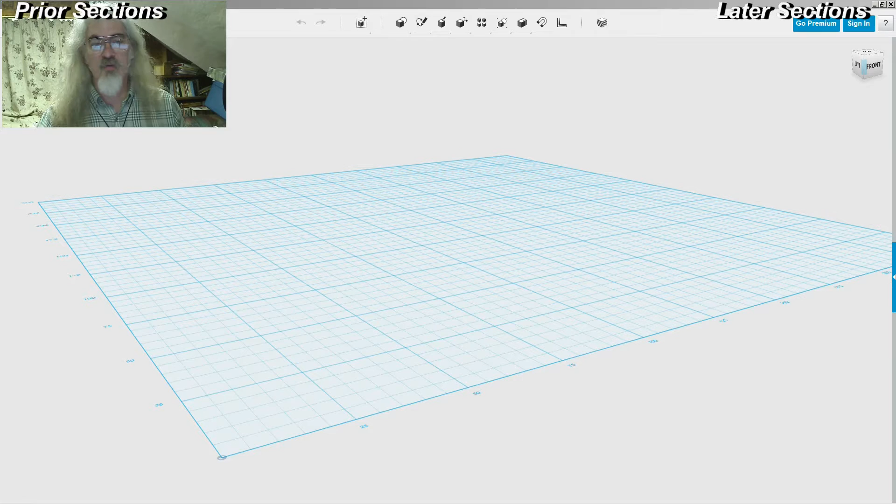Now here's actually a copy of what the Sea Dragon rocket looks like, and it's really kind of hard to see here. Let me just drag it over and put it in the screen capture mode, and I will zoom in on this thing. Notice it says station number, feet.

This command module down here is the Apollo command module. It's kind of difficult to imagine how big this thing is.

170 feet - it says water line right here. This thing is actually launched out of the water, out of the ocean. Come down here, there's only one engine bell - this is the outline of the engine bell right here.

This engine bell is 75 feet across. And 536.89 feet total. For reference, the Washington Monument in the center of DC, in the mall, is 550 feet tall. So this is almost as tall as the Washington Monument, and it's actually bigger around.

So we're going to do a model of both stages. This is stage 1 from here to here, and this is stage 2 from up here, and then this is the payload, this little tiny thing up here.

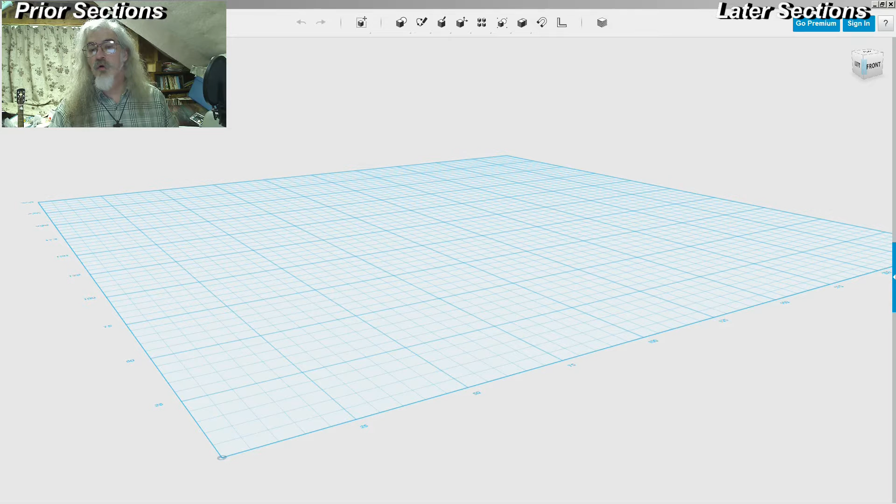But basically we're going to start with a cylinder that is the first stage cylinder itself, and that system goes from - where's the cylinder start - about 350 feet to 434 feet. Now I'm going to use 1 millimeter to the foot.

I don't know whether I can actually print that or not. Probably can't... no, I probably can. I may have to scale it to print it. I have a Leapfrog creator at work, so I may actually be able to try and print it on that.

All right, so over here in 123D Design, insert a cylinder. We're going to put it right on the center of the origin. Its radius is going to be 75, and its height is going to be 434.76 minus... where's that stage start? Let's see if it gives me an actual point. I just don't want the center of the thing to be at the center of the environment.

Minus 300, minus 150. Oh, you just let me do that. 434 minus 350. Did they really take that functionality away? That's a darn nuisance. All right, shoot, maybe I'll do the math in my head. 84 feet.

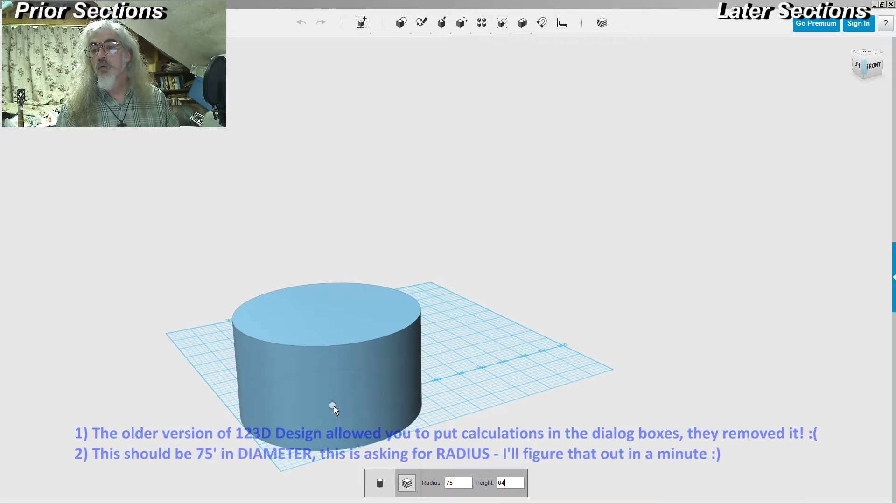That can't be right. 75 feet in diameter. 434. 350. Radius — it's a 37.5 radius. Proportion looks better. Helps if you remember it's radius and not diameter.

The upper stage is from... it's like about 105 feet to, what did that one start? 350? 105 to 350, it's 145. So this cylinder is going to go centered on that cylinder, 37.5 and 145 feet.

Does that look right? Yeah, that's not bad. Okay. Right, let's pull this back over here. So what you're seeing here is this is the first stage cylinder, and this is the second stage cylinder up to here. Those proportions look about right.

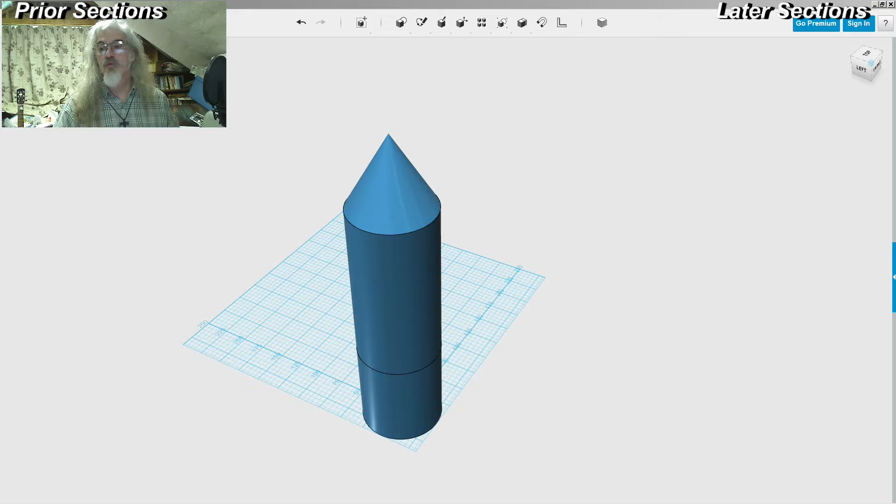Now that cone's actually going to get cut off because the top section is... I wonder what the diameter of the command module is. Let's see if I have it in the picture. That's stage 1, so this is what stage 1 looks like. This nose actually is reinforced to splash down in the Atlantic Ocean.

So I'd have to go look up real quick what the command module diameter was. Honestly, let's see, I think I want to guess. So we're going to guess that that was 15 feet in diameter. Can I put a cylinder directly up on top? No, it wants to make it...

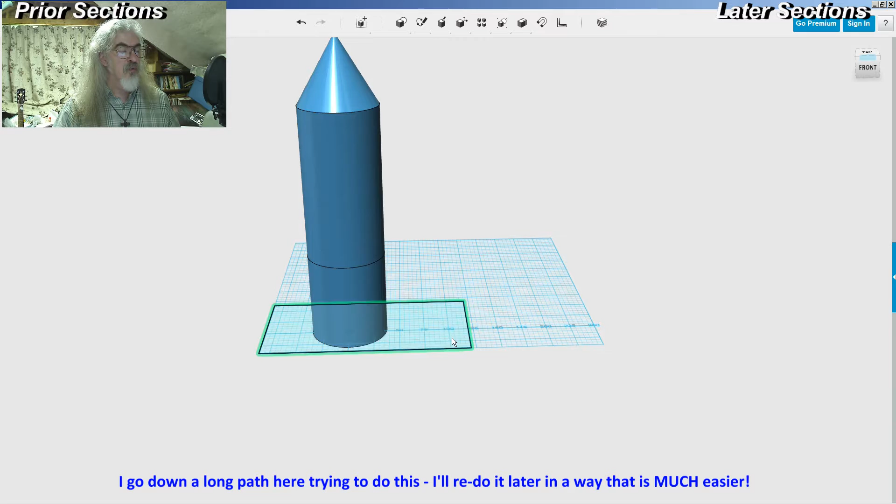Okay, so let's do this. Sketch a rectangle — doesn't matter where, right here. We're going to take this rectangle and move it up by... I said it started 42 feet. 42 minus, darn, this thing's big, 42 minus 434, 392 millimeters.

Obviously I did something wrong there. So let's measure it. What's the measure of that ring to that ring? Those results are 145. And that ring to that ring is 229.

Clear that. What's this point? Need to point to that ring. It says that it is 229. 145. 84. It's not 145.

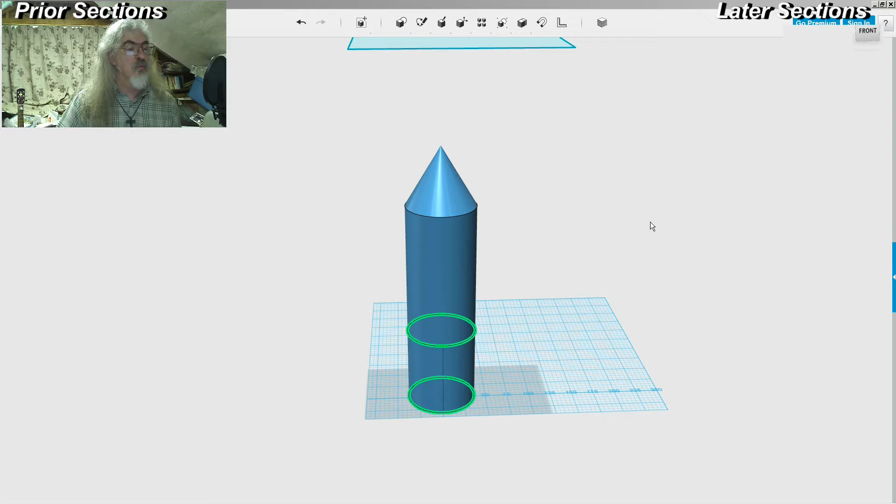It is. Close this. Move that. Move it that way. 100 millimeters, because I made this too short by quite a bit. So I need to make it taller. So what I'm going to do is grab that face, press pull that. I think I missed by 100.

It only let me do it in plane. That's kind of interesting, not what I had in mind. What I'm going to do is move it up here, 100 millimeters. Actually, let's move it back where it was. All right, let's redo that. Undo this, move vertically by 100, and move laterally by -100.

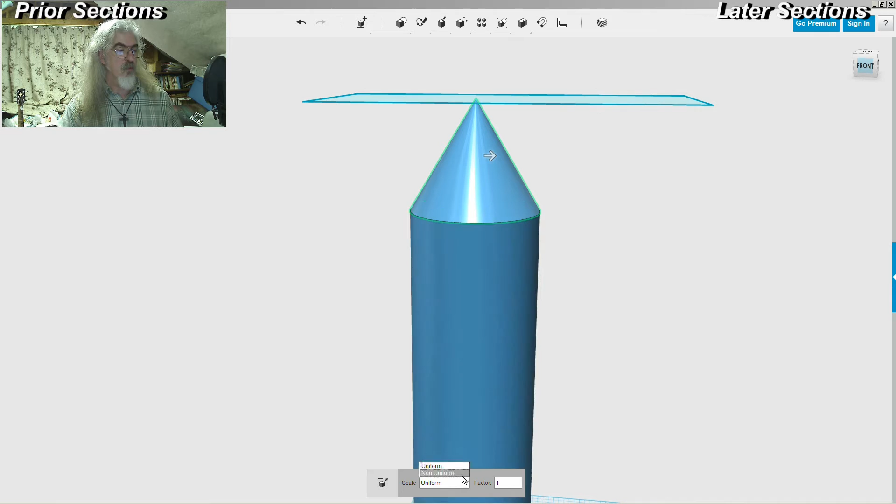Just put it right back on top, and now — oh, look at that, everything is right where it should be. Scale, non-uniform, XY, 1.2. So the only thing I wish it would do is scale it from a base point rather than scale it up and down. I'm better off at this point drawing a new cylinder.

Delete. I mean a new cone, oh I'm sorry. 37.5 and a height of 42 feet. We go through and do the math again. It goes from 42 to 105, so it's 63 tall.

Right, okay, so that puts that plane right here. Let's move this down. What I'm going to use — I'm going to use this plane to cut that cone.

At about the right location, I'm going to kind of guess. Alright, so now I'm going to use this plane to split.

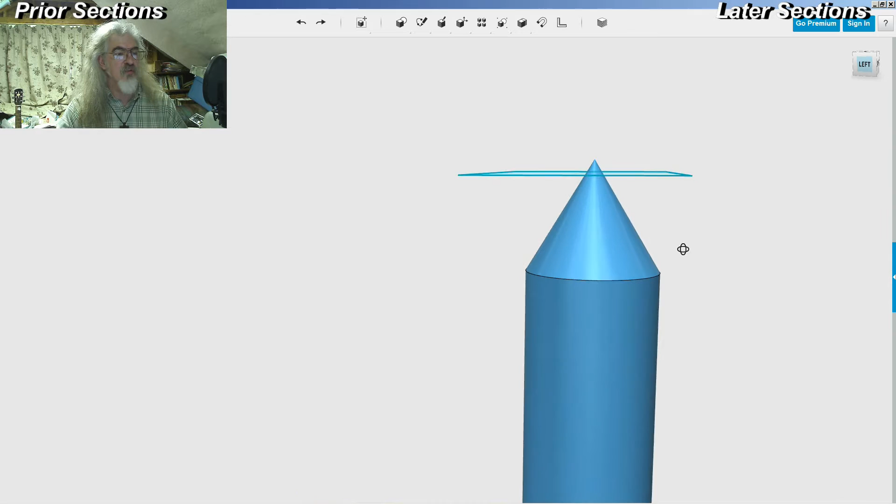So we have this sketch plane. This is where we want to cut this cone. Now, the easiest way to cut this cone is to make another cylinder and then cut the cone by the cylinder, but I need that cylinder to start at this plane.

So if I have a cylinder, I can actually put it on this sketch plane. See, it kind of won't let me do that, and it won't let me put this cylinder up here. So what I really need to do is create a cylinder that's right at the sketch plane. So I want to take this and project that onto this sketch plane.

Alright, now I have a cylinder. Now I have a circle, a sketch circle. So I'm going to extrude that sketch circle up, and it automatically deletes it, and I can get rid of the sketch plane. Alright, so now I want...

As you can see here, I have a short cylinder before I actually have the nose cone.

So I'm going to need to know what the diameter of that circle is. So let's measure that. It is 4762 in radius. Let's see.

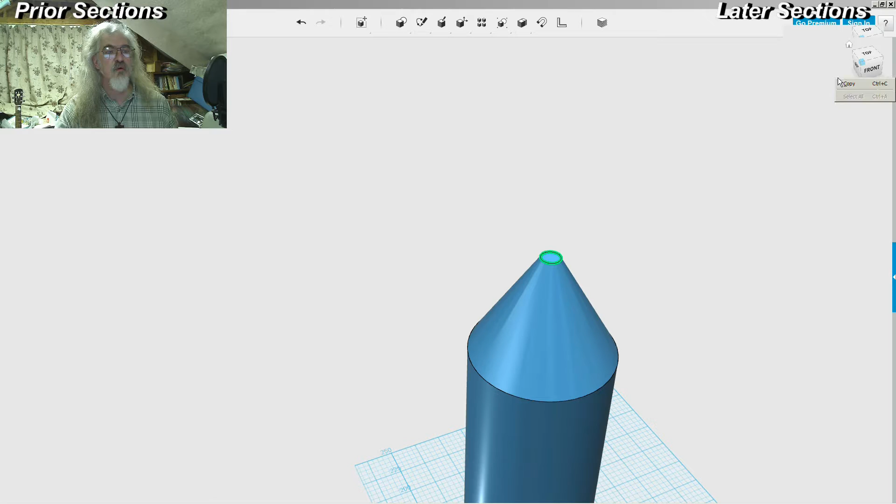Copy to clipboard. Let me do it. Come on. Select all. Copy. Okay. Close that.

Cylinder right here on the top center. Put it in the middle. 4.762. And a height of, I'm going to actually just take the default height, and then I'm going to guess,

Because what I'm going to do is I'm just going to make this look pretty good. Press pull this, move it down. It's going to be about, I'm looking at the picture, about like that.

Alright, and then we're going to need another cone on top of this. Cone right here, 4.762, same diameter, and a height of 10, 8, shorten that, 6, and that's about right.

Alright, we don't even have the rocket motor on the first stage yet. Okay, and so this is approximately what it's going to look like.

I'm going to go ahead and save a copy of this to my computer. Now that I've gotten pretty close to this, let's see, go up 1, go to Sea Dragon, go down, Sea Dragon 1. All right.

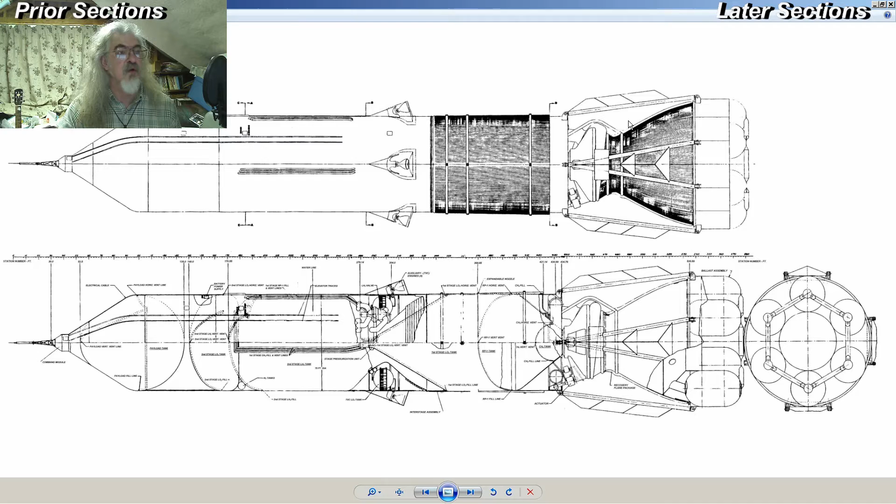So for something like a 3D print, not too worried about it. I may go back and refine it later, make a curve out of it. I can make a curve out of it now and revolve it around the center line. And maybe I'll do that.

All right, in that case, I'm going to need a line. But to get a line so that I can revolve something around about the center of this, what I'm going to need is I'm going to need a line.

I need an object I can revolve it around. All right. And to do that, I'm going to need a line.

So to get a line, what I've got to be able to do is draw vertically from the center of this thing. In order to do that, the easiest way I know how to do that is to go ahead and put a box in the middle of this.

And then my center's not actually centered. This thing is 20 by 20 by 20, so this is a standard size default box, and it's in the middle of the cylinder. What I'm going to do is I'm going to move it

so that its vertex is in the middle of the cylinder. Alright, so now that vertex is actually in the middle of the cylinder. The whole thing is not actually in the center of the 0 to 0 sketch.

And I'm going to draw a line from there, first point here, second point here. Done. Okay.

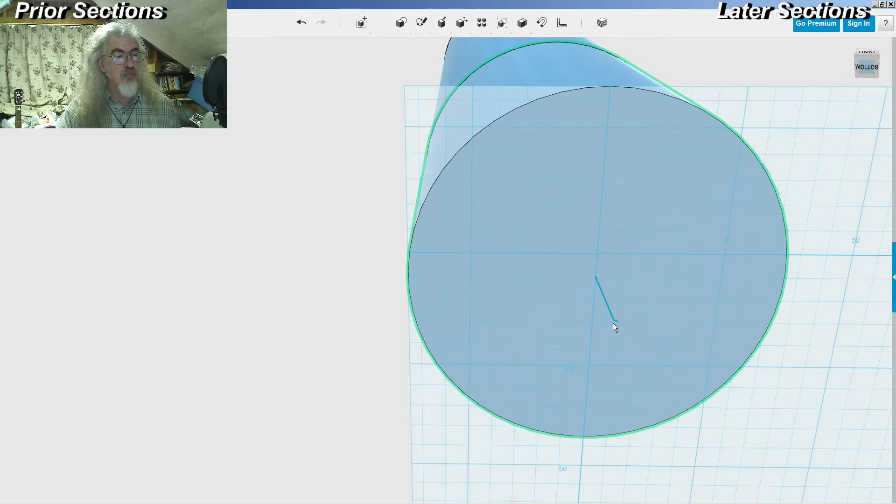Now I'm going to delete that. Now I'm going to delete this because I don't really need it anymore. I ended up with 2 lines inadvertently. I don't need the second one. I just need that middle.

Alright, so then let's do we need to do a sketch. Again, I'm going to need a different... Alright, so let's put it out here. That sketch is going to actually come...

Where's the plane of that thing? Let's move this out to here. Can I move it out to the edge? I don't know how wide this is.

So let's move it this way. Let's move it back to where that thing was before. 10 that way, 10 this way, and then we're going to move it to the left, minus 37.5. So now the edges should line up right on this edge.

Alright, that's good. Now, that thing needs to be a lot taller than that. I just need a surface for the sketch. I just needed to know what surface it was on, so I needed something right on the edge of this cylinder.

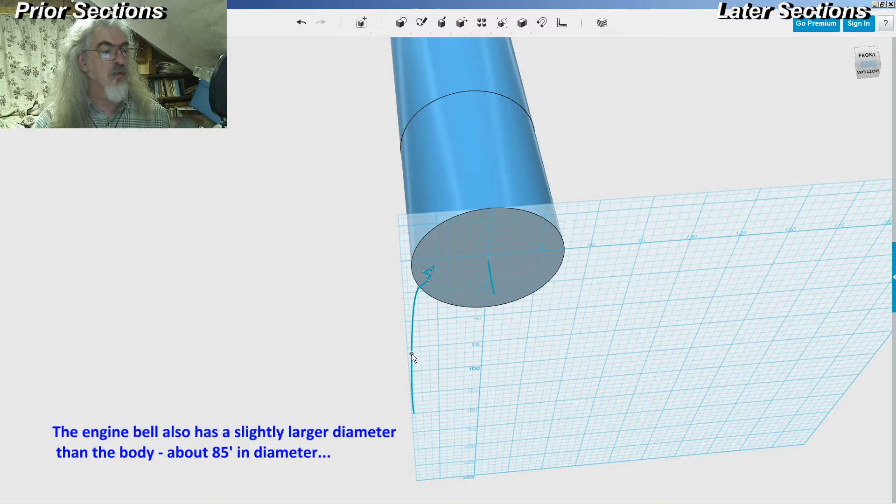The engine flares out. This needs to look more like that. This comes in here a little farther. This comes down. I'm just screwing with the splines here a little bit.

What's that look like here to here? Close, that's 80. Starting to look a little more like it. All I really did here was give myself enough control points that I could go screw with it.

Alright, 80, so it needs to be basically down here. Now, I can't... Now, see, it can't go that far out. So the whole thing actually needs to come in a bit.

Perspective was screwing me up a little bit there. You can do an orthographic view here too. Where are we now? Oh, 100 millimeters. That's pretty cool.

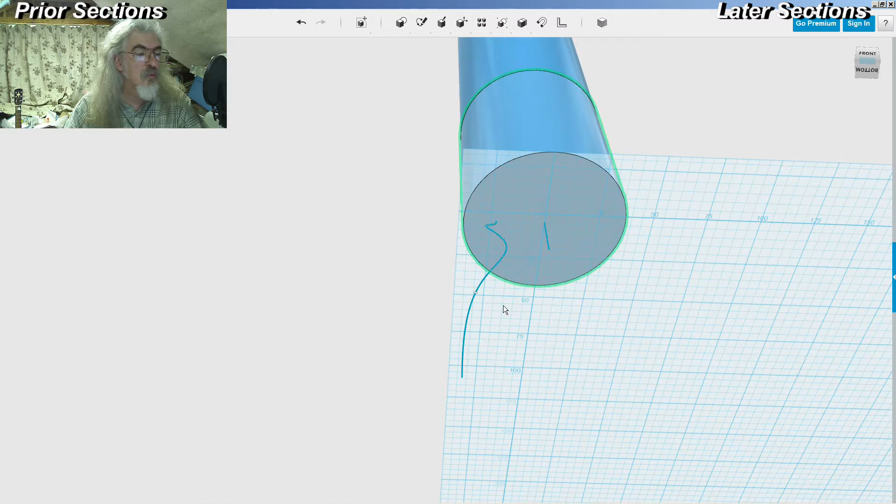I still think that shape's not quite right. This needs to come in, and this needs to come in. That started looking like it. Yeah, that looks pretty good. All right, let's take this spline and revolve it. Revolve.

This has to be closed. Silly me. All right, so I need to have made a closed path here and not just a curve. That curve's not going to do me any good as it is. All right, so it's got to be a closed face. Get out of that mode. So what I need to do is make a polyline.

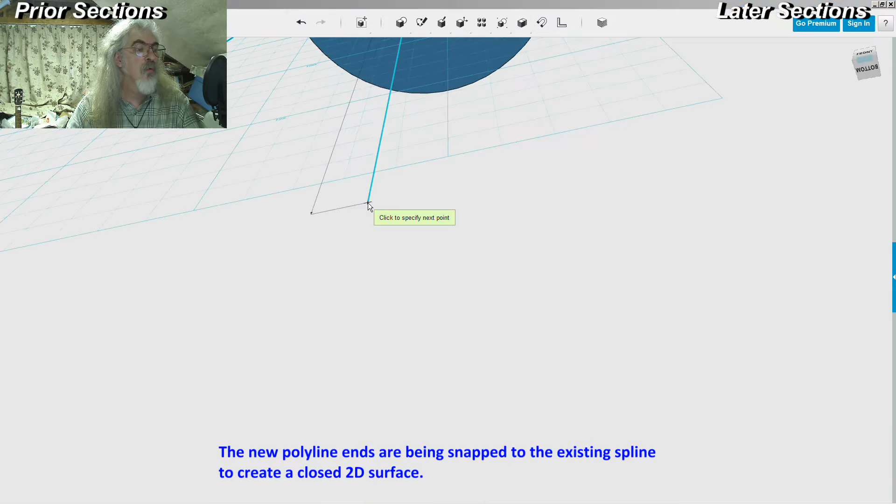Whoops, grabbed the wrong mouse control. We're going to hollow this out anyhow, so it doesn't matter if this bottom is exactly parallel. Now I've made a solid. Okay, now I can take this whole thing and revolve it.

That's what I want to do. Take this face and go on the widget, revolve it about... profile that against that... 360.

And you won't do it. Why? Axis is... new solid... 360. And there we have our engine bell.

That's not too bad. That's not too bad at all. And it looks a bit like a rocket. Again, I'm guessing on the engine bell shape exactly, but it's not too bad.

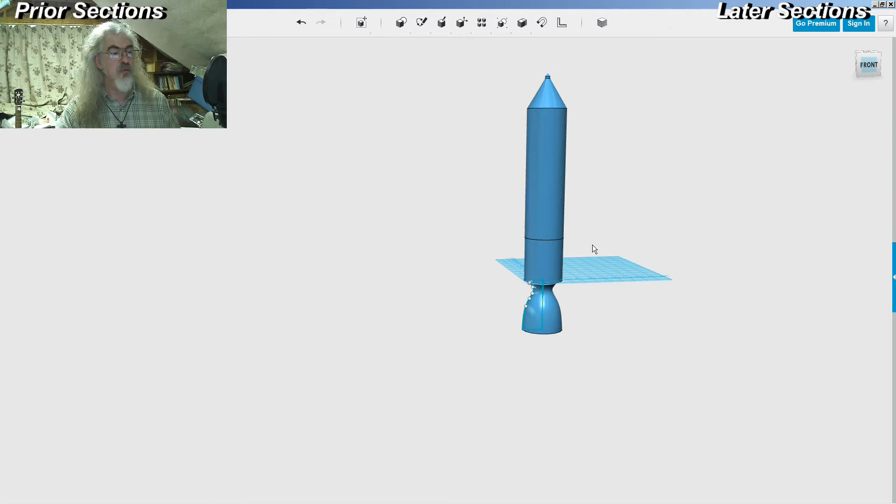Now the thing is, it should be hollow, of course, right? So I want to take this shape and shell it out. Shell. Put this inside.

Huh, doesn't know how to do that, huh? That's interesting. Well, sometimes the limitations of this package are kind of interesting.

Let's do this. Radius 35. Yep. Height 80. We're going to take this thing and rotate it 180 degrees.

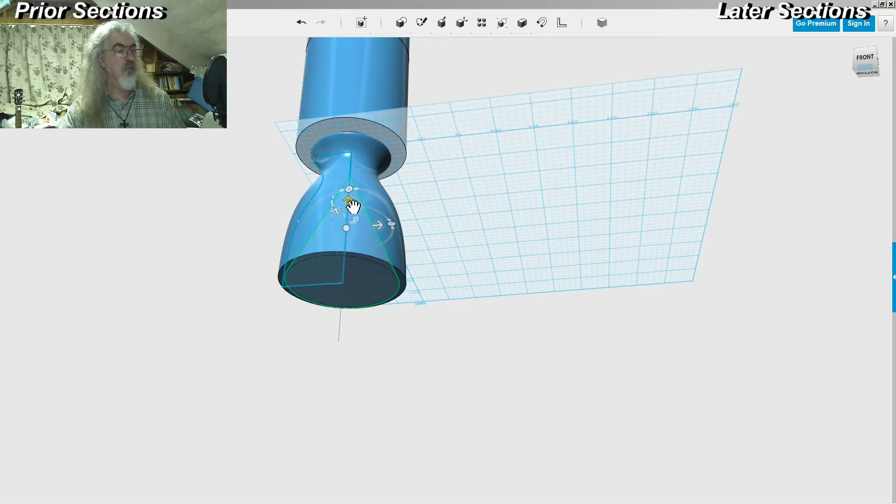We're going to take the whole thing and move it up by... I don't want to go all the way up to 80, even though it's 80 tall. Let's just go to 79.5. And then let's do this: merge, subtract that minus this.

I was curious, let's move this up by 79. Must have had it rotated not exactly 180. Subtract the large minus the small. There we go. Now we have an interior engine bell, at least a couple millimeters thick.

Now we're getting somewhere. At some point I'm also going to go back and if I take these three things and group them together, now I can move that whole thing up. I need to remember how much I moved it, so let's move it by 100. That way I know where it is.

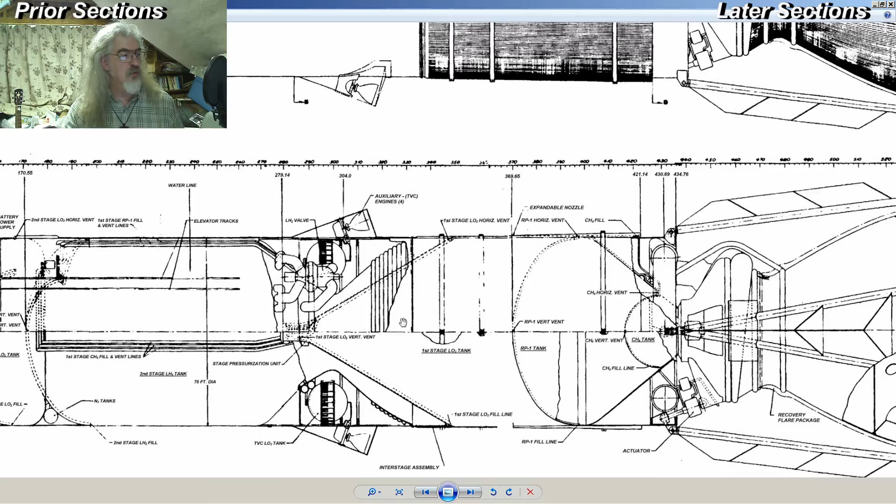One of the other features of this crazy system is that the first stage, in order to have more tankage, didn't cut off straight. It was actually pointed, and you can see that here. See this point right here? This is part of the tankage of the first stage. This is the engine bell for the second stage. So the first stage actually goes up inside the second stage in order to increase the tankage and shorten the overall rocket. Otherwise it would have been 700 feet tall or something crazy. It's pointed, kind of like the first stage is also pointed.

So I'm going to need to add a cone to the top of this. That represents the first stage. 37.5, and how tall is it? Jeez, I don't know. Let's say it's 40 tall. Looks about right, I'll go back and figure it out.

Now I'm going to take these things and group them together. Let's move it back down. That's 100. Let's make a copy of this, because I'm going to use it to subtract this stage from that stage, and I want to make sure I don't lose it. So I'll copy it and paste it, and it automatically gives me a move dialog. I'll move it over 100, and then use a subtraction - subtract this minus that.

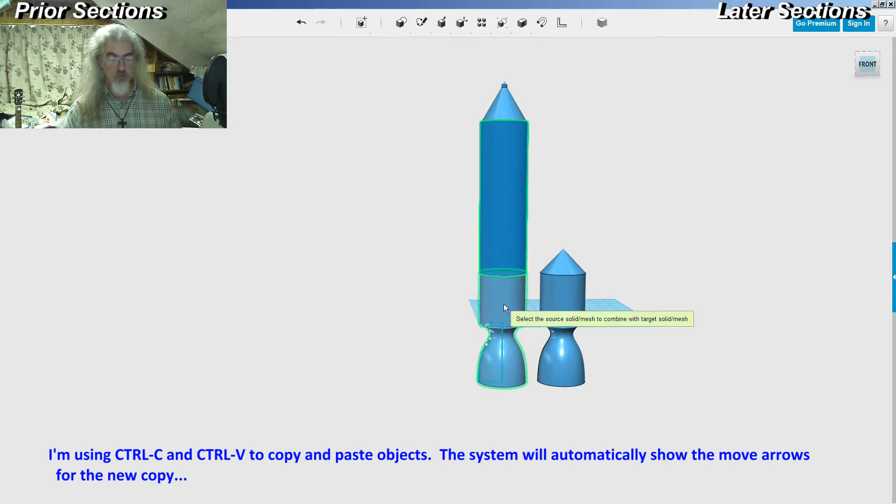Now I'm just going to leave the sketch. Now there's a cone in there, it's hard to see. Move that back by minus 100. So there's the basis of that.

Now the next thing I want to do is the vernier engines. These are the control engines that sit out on the outside - the TVC, thrust vector control engines. Let's see if we can figure out the heights of these things. 270, 280, 290 - so they started about 283 and go to 320.

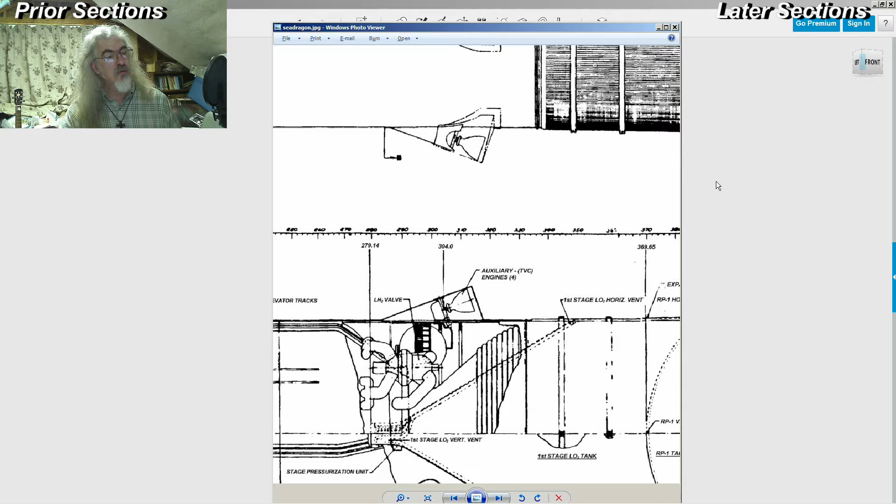283, 320, so they're about 37 tall, and we'll have to figure out that angle. That's a... I don't know what that shape is. Let's see here, see if I can see it on one of the other sketches.

Looks like they are squares. So I need a box, we're just going to stick it down here somewhere. Well, I'm going to stick it on the side of the rocket, they're going to be... I'm just going to stick it down here on this face.

I thought they were 37 in length, so the height is 37. We're going to guess 20 by 20. Man, these things are really huge - how about a 20 by 20 foot box just for the thrust vector control engines? That box is this size. I mean, 20 by 20 is a very large room. These things are huge.

All right, I'm going to need 4 of these, so I'm going to make a copy of this one and just use the other one. But I'm really going to be just moving these guys kind of approximately where I want them. Now, they also have to rotate 45 degrees that way.

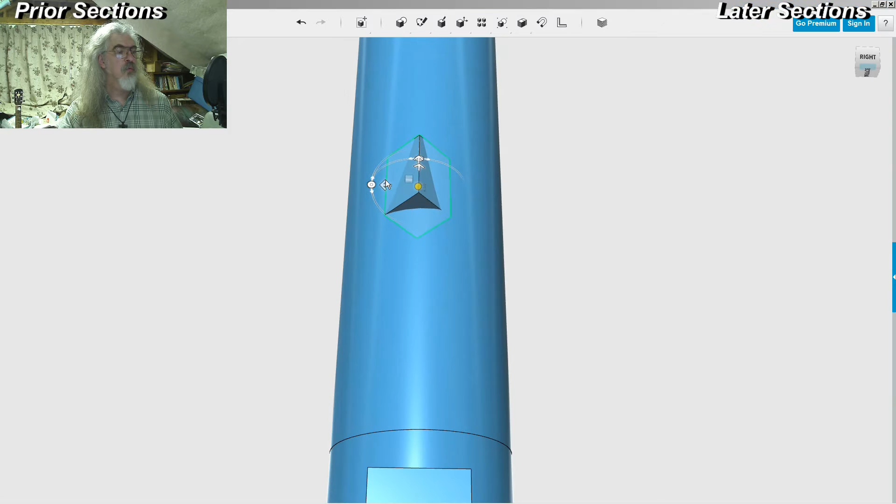Alright, so they've got to be taller than that in order to... oh, that's better. The reason I keep going back to move is because the axes will stay aligned with the object until you disconnect and reconnect them. Alright, so then I need to make this hollow - shell that out and make the inside thickness... yeah, that's pretty cool.

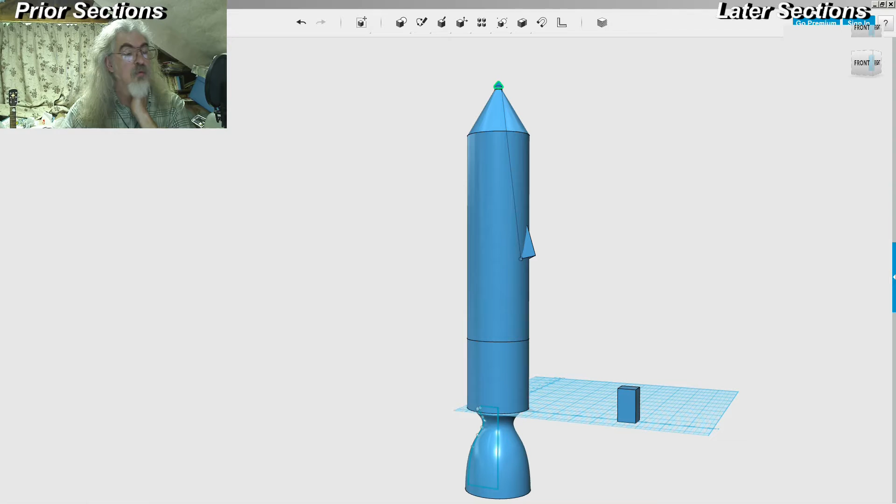So now I need to find out, where did I put this? I need the capsule to the edge of that, and that distance is 209. That's to the bottom - let's see, what was that number? 310. The 209 is 40 feet off the top, off the point of the escape tower, because that's the base of the cylinder of the command module. So this is currently at 209 plus 40, roughly 250, needs to come down.

Really? Yeah, it needs to come down about 60. So this needs to move down minus 60. Yep, that looks pretty good. Actually, even that's probably a little high. Here's what I'm looking at - the distance from the bottom of that to the top of the first stage, that distance right there, and that looks to be a little too far from here to there. So I'm going to say I need to move it down another 10 feet.

Yeah, that looks darn good. All right.

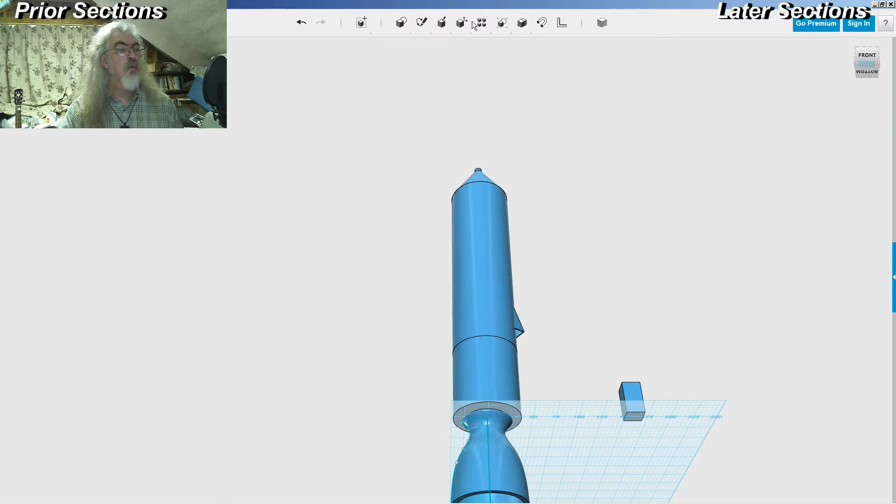Take that. Let's make a pattern of these. Circular pattern, that's solid. I still have this axis down here somewhere. Circular pattern, that object. Axis, that axis. Oh, how many? 4.

That's starting to look like a rocket. Save that. All right, all right, more later.

So I left off with the Sea Dragon right about here. I colored it a little bit since I finished that, but that's all I did is apply materials. The next big trick is that I'm gonna do this section. Now the engine bell comes all the way down to here. This is a ballast system down here, and as you can see, maybe here, this system comes all the way up inside the engine bell.

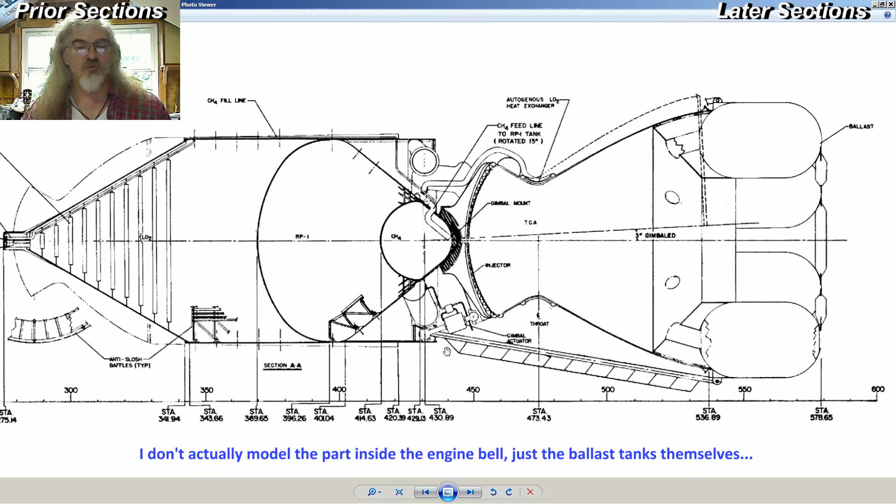So I'm going to make this as a separate unit, and it's got what I'm guessing are 4 supports here that go from hinged right here on the ballast tank and connect up here into the system. Let's see if the other picture is any clearer on that.

Pull it over here. Yeah, so you got these down here, and I'm not sure what these sections are there. This appears to be a cutaway portion of that. Might have to go in and actually look at the drawings here.

But what I want to make right now is this section here with this ring and these ballast tanks. This ring, I think that the nozzle continues down. Let's see here if I can look at both of these.

If you hear outside, my daughter's got a bunch of friends over.

Yeah, the engine continues further down here. This kind of covers it. So this engine continues down inside of here, I think.

Might have that engine bell a little too long. Let's get rid of these guys and go back to the model. All right, yeah, so that...

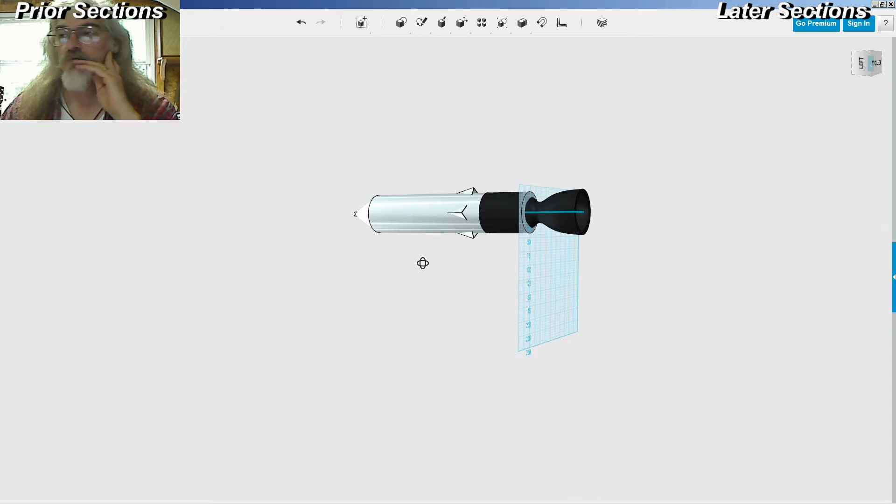Pull that back over. Yeah, it looks to me like that engine bell is probably too long. It should probably cut off about here. Let's see if we can figure out a height from this drawing.

So the engine bell starts at about 440 and runs down to, no, about 540. So my whole engine bell section here is about exactly that same height. I probably need that flare to be slower just to make the curve right, but I'm probably not going to change it. So I got the height right.

Okay, that's good. The next thing is, of course, to try and figure out what to do with this section. So you've got a skirted section here, which is actually round. Oh, come here.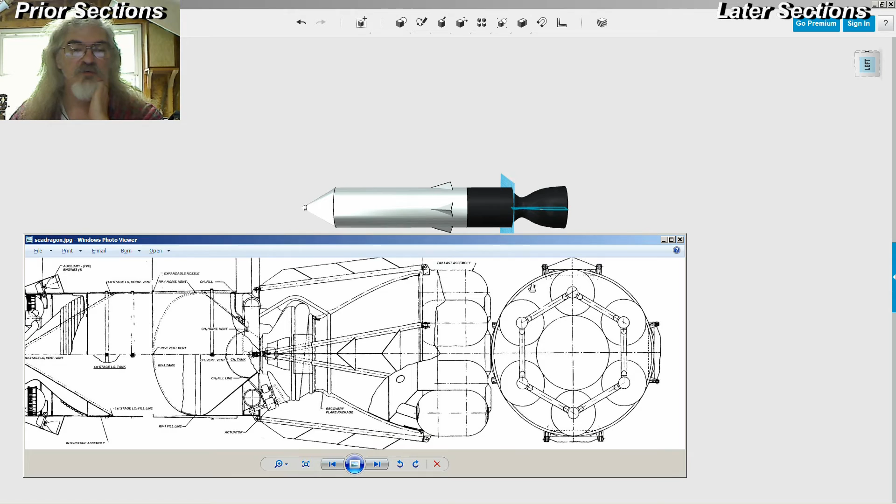Let's see if we can look at that at the same time here. So that rounded, so that section, this section here is actually this segmented section here. It's just shown as a segment. We'll make it a whole cylinder.

And then there's supports that come up. These supports will come up from the bottom of the engine bell all the way up, kind of where this profile looks like it runs to a certain extent, right? So it'll be kind of cool. Let's see.

That thing is the bottom of the engine bell at 536. It runs down to about 570. So let's call it 40 feet tall. I think it's 4 stories tall. That's a big ballast tank. There's nothing about this rocket that's small, but wow.

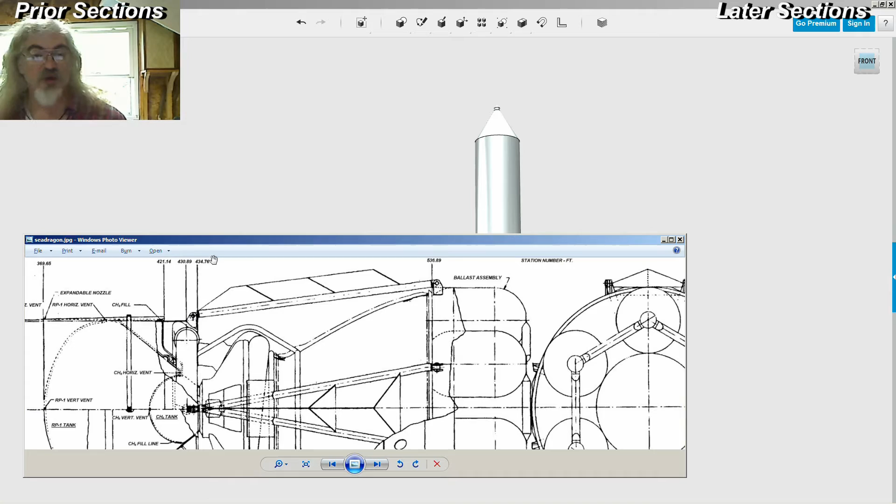And then these arms are like 100 feet long. I mean, they run from 434 to 536, so they're 102 feet long and angled in slightly. It does tell me that the engine bell is actually slightly wider than the outside diameter of the rocket body, which mine is about the same size here. So I could actually flare mine out a little bit more and get rid of some of this curve and make that a little flatter, which it probably should be anyway, right?

But somehow I have gotten this cylinder and this curved section combined, and I really didn't want to do that. But if I'm going to delete it, invalid operation, and redo the curve, anyhow, it kind of doesn't matter.

All right, now I need to know, I'm going to measure here from this face to this edge, and the measurement system tells me that's 84 millimeters. Cancel. 84 millimeters. So I need a cylinder that is tied to the bottom of the center of this.

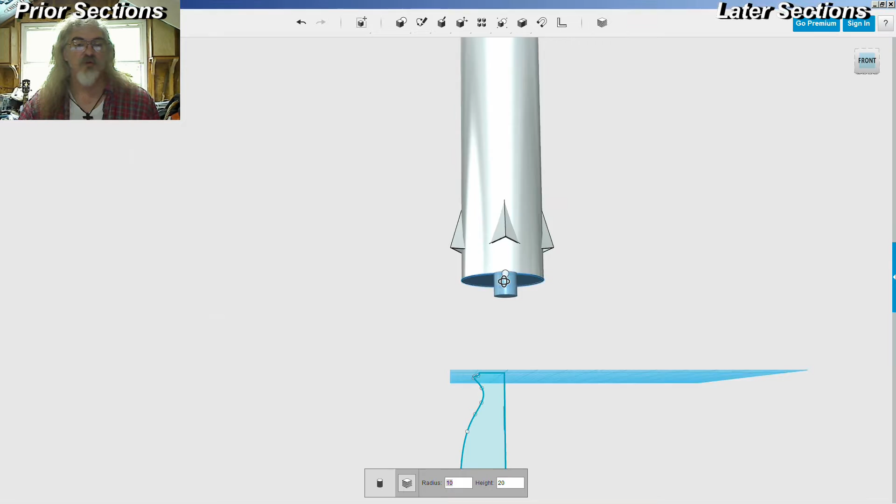That's a radius of 37.5. Come on, grab this system here. 37.5 and 83 tall. Okay, all right, that's good. And then I want to change this curve a little bit. Pulling this line out gives me a better profile.

Alright, let's take this, revolve it about... there's the axis selected up here, around this axis, 360, and make it a new solid. Okay, these two should be separate objects now. Alright, that's good.

So the one thing about this is it means that I don't have a hollow cone.

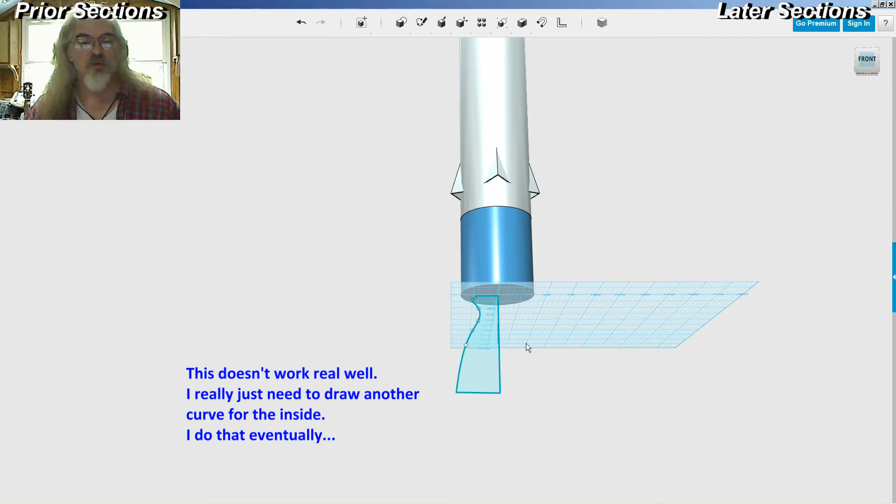So let's see. Hide none, do that, show sketches. Alright, let's take this whole thing, copy and paste, move it this way, minus 100, just so it's convenient. I know it's 100 away, right? So then I'm going to take this whole thing and scale it non-uniform, this way, factor of 1, let's see, 0.9.

Now if I copy this, move this back, move this back 100. Did it change? Oh, it didn't really do what I wanted. It's kind of weird.

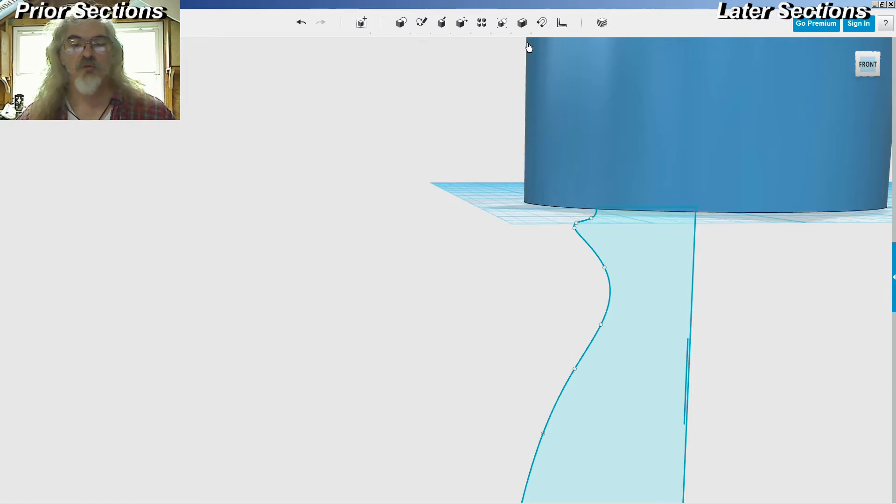Let's just draw another curve here, a spline in this face, and we're just going to make this largely a solid. Click to specify the first point. I'm going to click in here, click in here, we're going to follow this contour.

This doesn't matter because I'm going to basically use this to delete this anyway. Alright, so that makes that a solid. Let's take this and monkey with this curve a little. Change that curve.

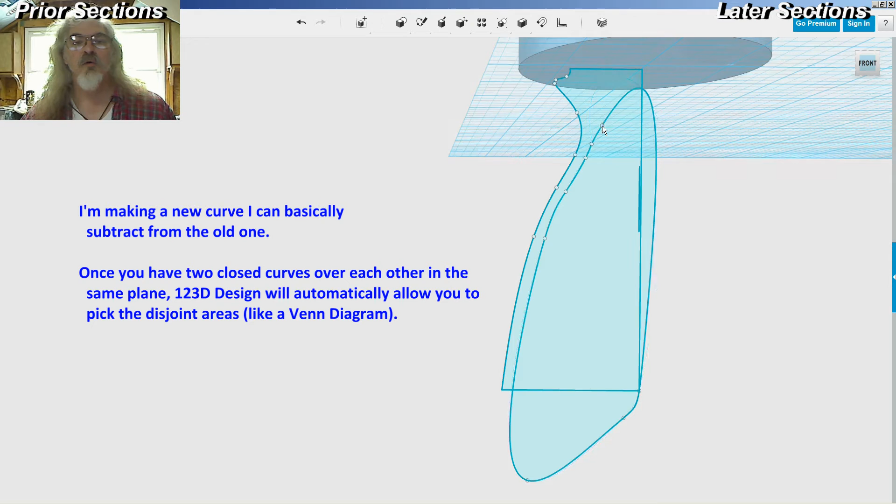So let's take this region. Here's what I'm trying to do: take this region and revolve it about this axis, 360. No, it didn't like that. Revolve about this axis.

Now I have the same outside profile, but I have a nice smooth inside profile, as I subtracted one from the other. Alright, that I like. All right, let's select all this stuff, and well, let's just go over here, hide sketches.

So you still have the sketches. Nice smooth engine bell on the inside. That's pretty cool. 3D printer should be able to handle it pretty well with basically not really any supports. Maybe it'll want to do some supports right in the middle, but if I had some hangers in there, it wouldn't be a big deal. All right, so I'm way happier with that engine.

All right, I've saved this as version number 2 of the file. I made a copy of the original before I started monkeying with this. And these are still separate objects, which is good. I don't know why they got combined before. Somehow, the way I did the subtraction before, I think did something funny to it.

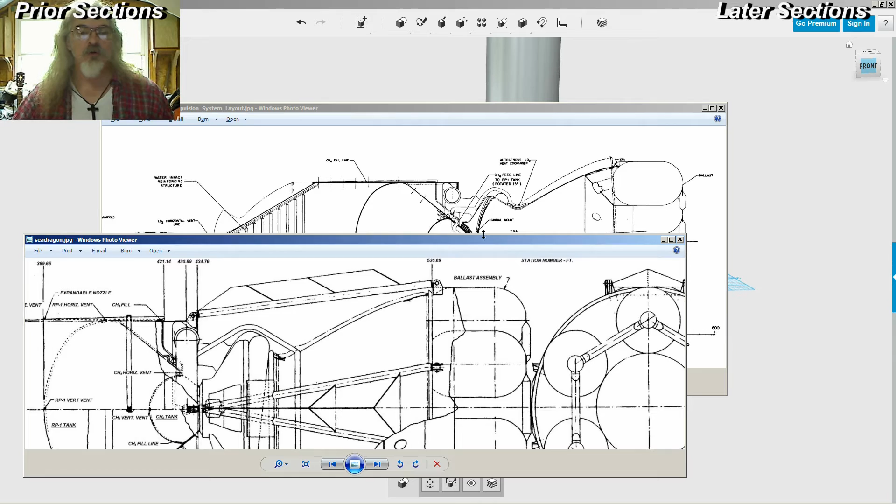Does this drawing have any measurements down here? No, well, this is the drawing for the propulsion system. Let me find the other one. We're going to end up having to infer those sizes. This is 100. Well, we know what this is. It's a little better than 75, right?

What's the outside diameter of this? Make sure I'm getting the correct ring here. It tells me my radius is 43.291, so that radius needs to be 44. So that's 88 in diameter times pi, and that'll give me a circumference. And then if we go back and look at this drawing, the outside of the circumference is going to be where these things go.

We can kind of infer this from this distance. I'm using my fingers here, you can't really see what I'm doing. I'm using my fingers, and it's about, let's see, where's the 500 mark? They're about 25 feet in diameter, 25 feet in diameter and 40 feet tall. It's big as a house laying on its side. So if they're 25 feet in diameter, that's 12 and a half feet in radius.

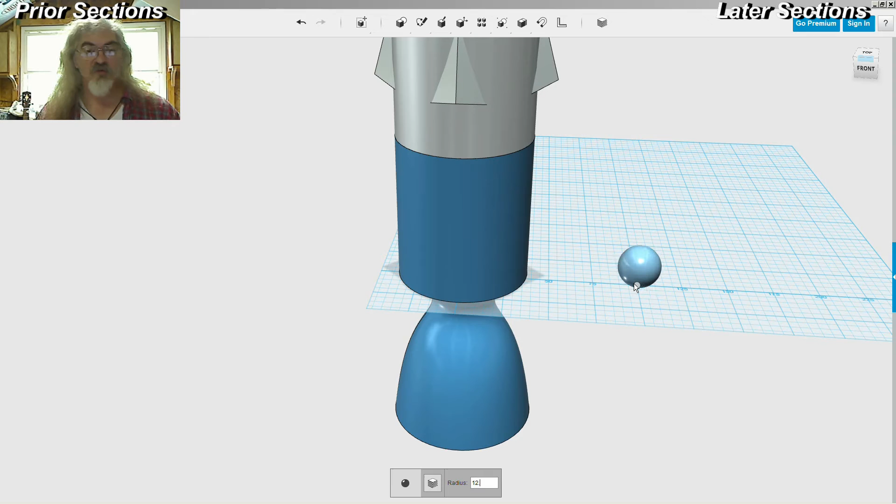So let's make some, let's try and make a module here. Pick a sphere, let's just put it in the center. Radius is 25, 20, 12.5 feet in radius. And then copy this up.

Paste. And 12 and a half is 25, and I want them 40, so the difference should be 15. All right, so that looks about right. And then I want a cylinder to go in between them. The cylinder should be 12.5 by 15.

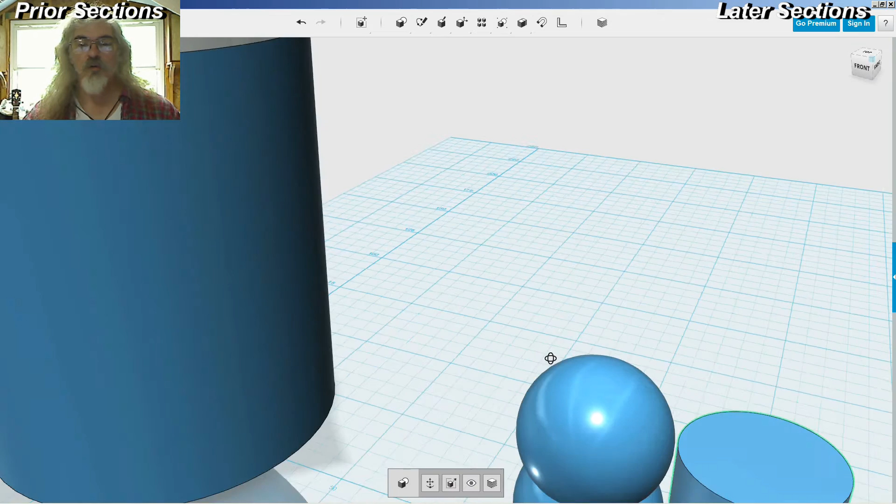Oop, not quite lined up. That looks pretty good. So it's not quite lined up the way I wanted it. Move up by 12.5. All right. Move it over. Move it back forward. Ah, that's more the thing.

How does that look shape-wise compared to these guys? That's pretty good. All right. I'm going to group these guys. I'm actually going to merge these together. Combine, merge that, this, and this. Okay. All right, now I have a pill.

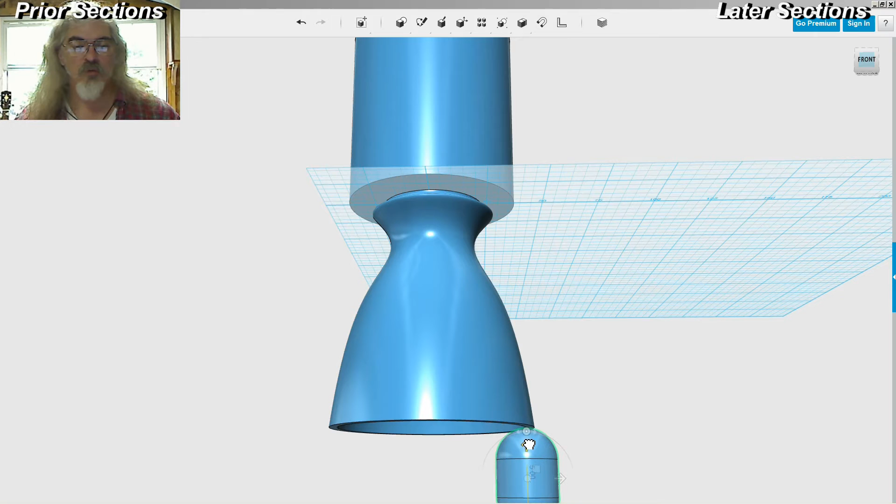All right, so let's move this guy. Now he needs to move down to just fit the outside of this rocket motor assembly. Move. Kind of guessing on the move here. Working on the alignment here. Ain't bad, all right, let's.

What's it need to look like? Outside, just a hair. All right, not bad. Let's show the sketches again, because I'm going to hide these guys. I want that line. Well, that line, I don't know, that line ended up not being in the center somehow. Oh, maybe he is. Is this rocket still really in the center? No.

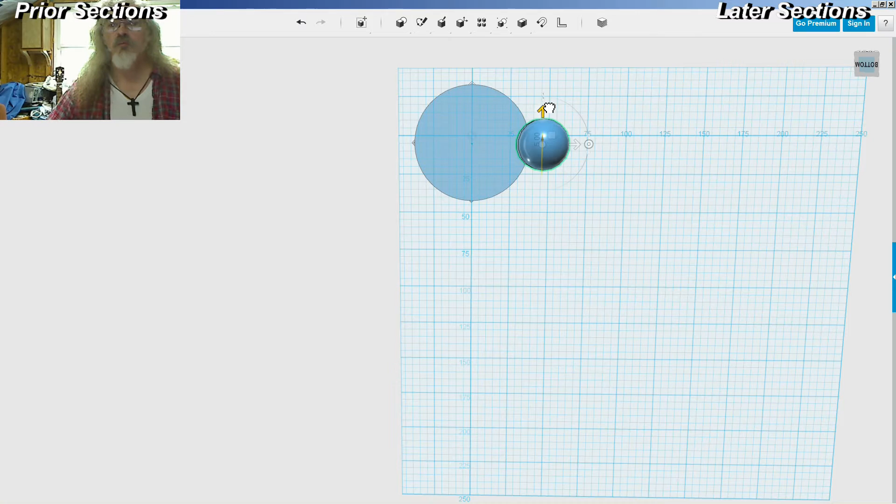All right, let's see if we can do this. Now, circular pattern, that's solid. This axis, 6 copies. Hey, that's all right. Save. Okay.

That's pretty neat. So the next thing I need is this thing actually has a skirt here that's about 30 feet tall, so I need a cylinder. Again, we're just going to have to move this to pretty much where we want it later. Now we figured out that was 44 in radius and... nah, yeah, no, it's 43. Yeah, that's right. So then the height was 20. Okay.

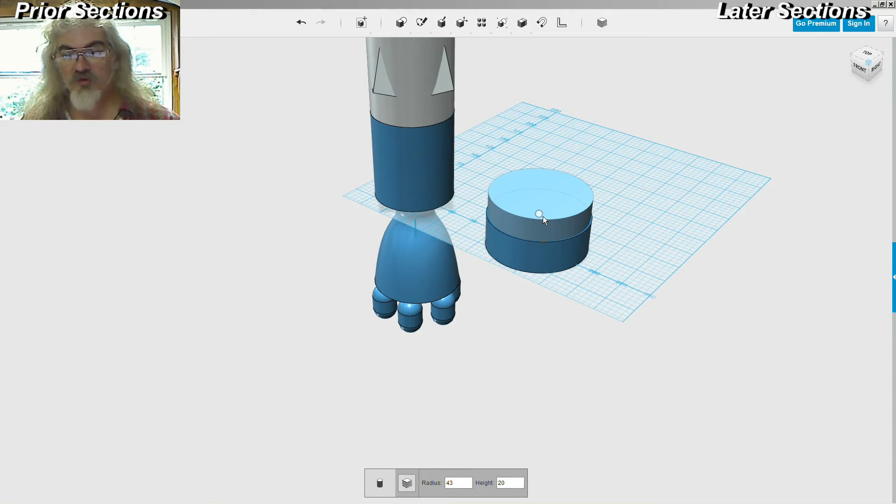Now we're going to make this a hollow shell. What I'm going to do is take another cylinder, put it in the top center, make it 43, 1 millimeter thick. Nah, it needs to be more like 3 millimeters thick, just so it'll print. 40, 41, and we're going to make it 40 tall. It's hard to print anything under about 2 millimeters thick as any kind of shell that's going to be of any substance, so I made it just 3 millimeters thick, which is... all right. Move this down.

Move it down one more. Okay, and then I'm going to subtract this minus that, and end up with this ring. And I'm going to take the ring and move the ring down.

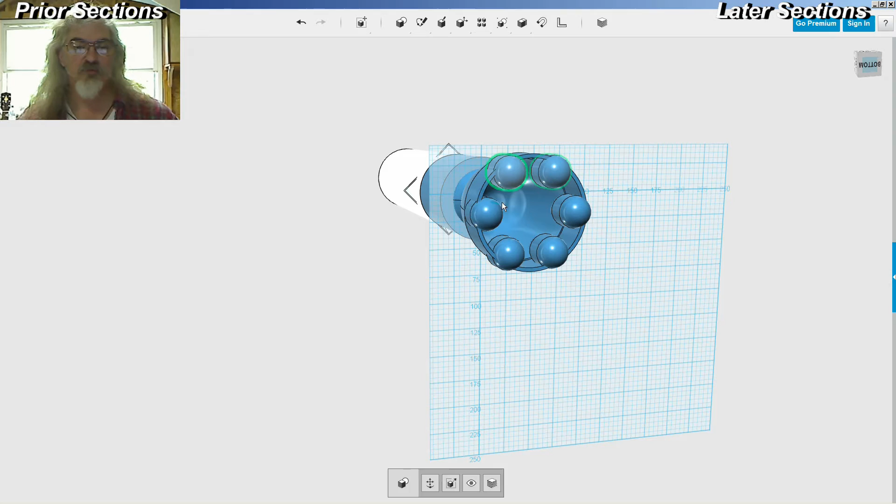Looks like I almost got that lined up. So now you'll notice that these guys are sitting on the outside of that ring, and they need to sit on the inside of the ring. So, 1, 2, 3, 4, 5. You go away. Probably should have done the ring first, huh?

Alright, let's move this guy in just a little bit. Move him in. Let's say minus 7, that should be just inside. It's not actually touching—there's actually a support structure that's going to have to go along the bottom of this.

I don't know what this center represents. This may be where the plug attaches. Plug's not shown in this diagram. These actually look like they intersect this outside wall. It'll print better that way.

So let's move this guy back out 1 millimeter. 1. So he actually intersects that wall. Sorry, just reorienting the model here. I want to see that he's sticking out just a little bit like that.

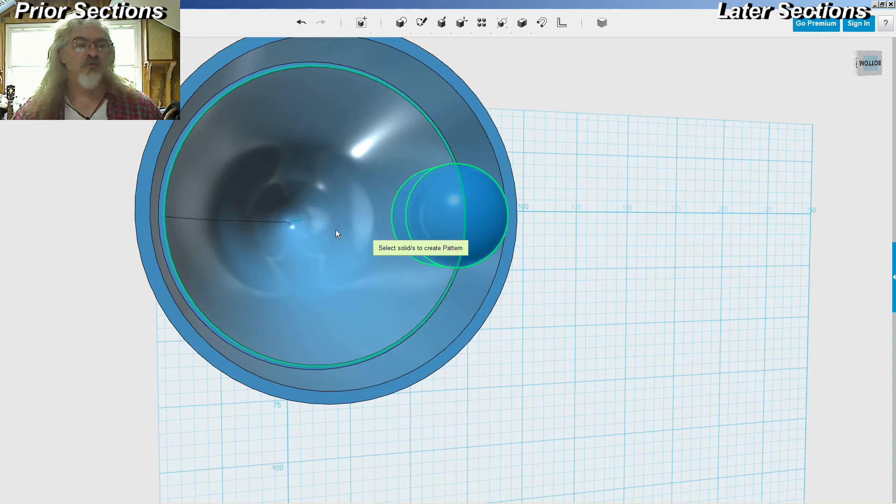Okay, now then I'm going to recircularize him, make a new circular pattern. This guy, now I want this whole solid axis. Come on, give me the axis, you silly program. Somehow it didn't select a solid correctly, it selected an aspect of the solid. There we go, select the whole solid axis. That axis, there we go. 6. Okay.

Now we're getting somewhere. I've left these—now they've got a gap in between them. That's okay, these are actually going to be printed as separate objects anyway, so we're going to leave them solid, separate for now. They all intersect the shell nicely. That's good.

Now I'm going to need a... what do you think? What's the cross section here? Square, round, cylinders? Yeah, look there.

I'm going with cylinders. These are cylindrical, and there's something on the bottom of each one. I'm just going to go with a cylinder here. All right.

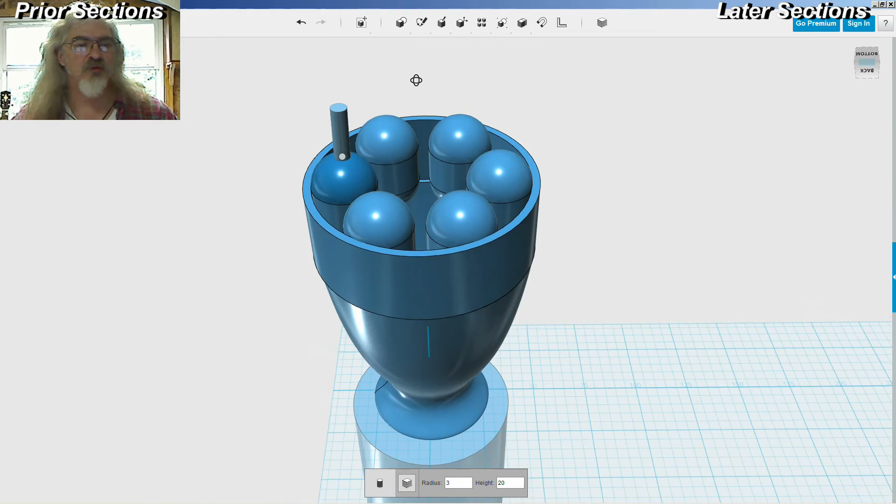All right, make a cylinder. I don't know if I can do this easily. The diameter is going to be really small on this, maybe 3. I wish it would give me a nice way to do a nice vertical cylinder on the top of this.

Let's measure the distance between these first. Here to here. I don't know what kind of distance it's giving me. 4 millimeters, which is obviously just the edges between them. That's not what I want. I have to guess.

We'll just push-pull a cylinder. Let's do that here. Okay, so we're just going to make a cylinder. We're going to put it right on the edge of this thing. We're going to make its radius 3. We're going to make its height—we'll just leave it at default.

All right, so we're going to take this thing and first off, we're going to rotate it 90 degrees this way. Right, and then we're going to rotate it by 30 degrees that way. It looks pretty parallel.

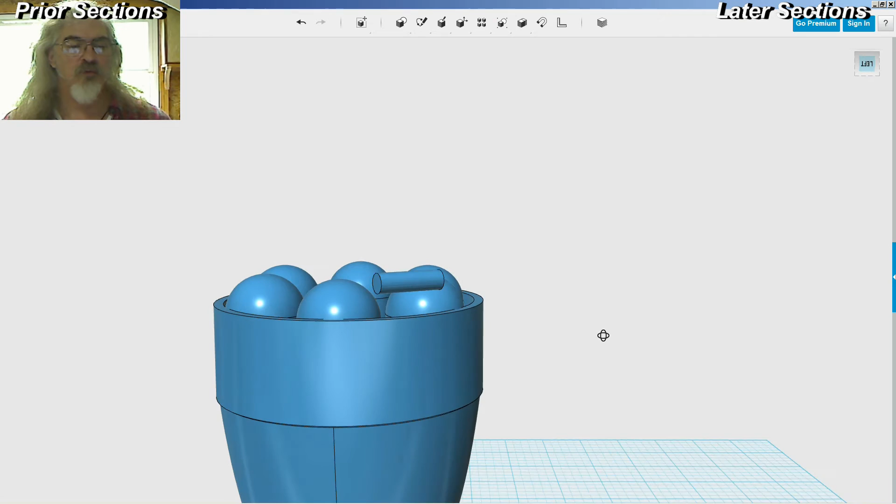We're then going to move it—it's giving me a weird angle control here. So we're working upside down here, so it's a little bit funny. It's pretty well lined up. It's a little bit short.

So we're going to grab this face and push-pull that face out until it matches. Yep, a little bit more. That object, that face. Grab that thing, push-pull. Let's get over here so we're looking at it on 90s. Right there, that's pretty good.

We're gonna make that thing smaller. This was 3 millimeters in—oh, that's a radius. Oh, I can go down a lot more. 1. So that's 2 millimeters in diameter. 1.5.

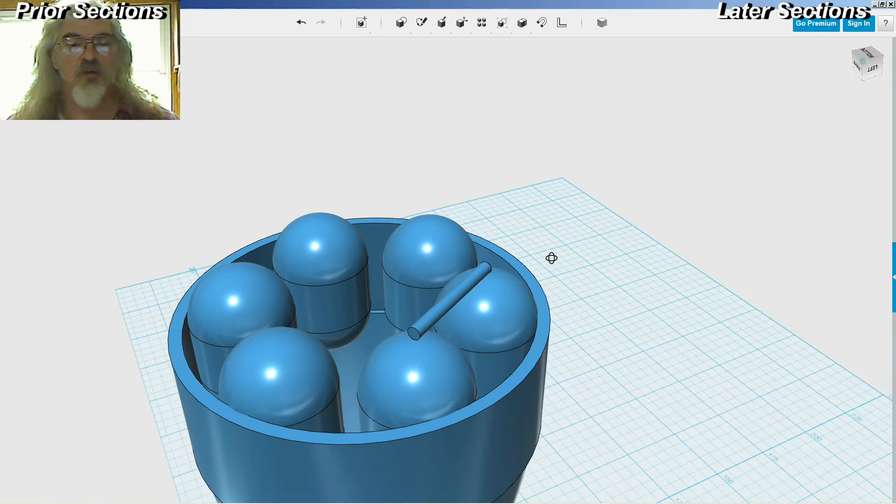That's closer. All right. Move this down until it touches. That's pretty good.

Let's see what happens if we make a circular pattern out of these. Take that object and this axis. Invalid operation. Why? Circular pattern—that's solid. Axis, that axis. Oh, it's giving me an invalid pattern for some reason. Looks like the solid is okay. It doesn't like the axis.

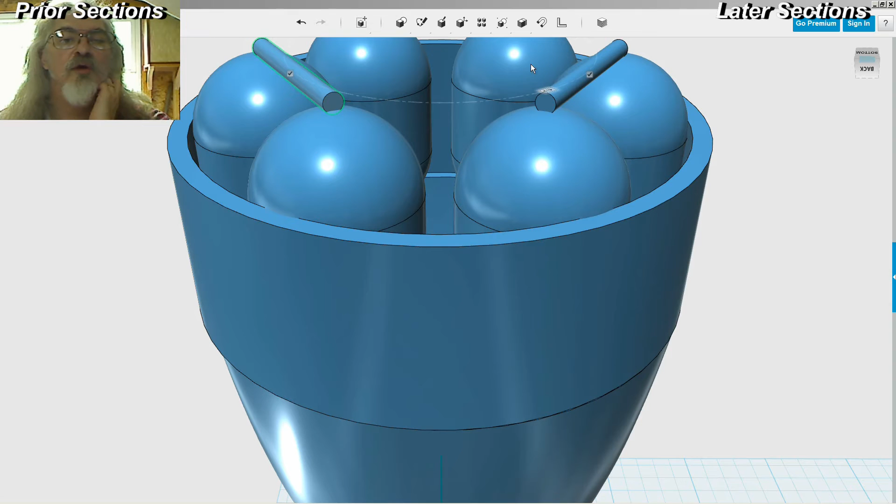There we go. 4, 5, 6. Cool. All right.

That'd be an interesting thing to try and 3D print. There's some strange ways you're gonna have to run supports underneath of that, print it upside down or something. I'm happy with that. Let's save that.

How about it, Bob? How am I doing? Need the outside supports.

In the reproduction PDF, which you can see here, there's a really bad reproduction of a pencil sketch of the Sea Dragon essentially floating out to sea with an aircraft carrier.

I wish there was a good copy of this pencil sketch. I wonder if Scott Truax has one. He's Bob's son—Scott is on Facebook, so I may need to try and follow up. Maybe it looks like this. Maybe I was wrong about this. I don't know.

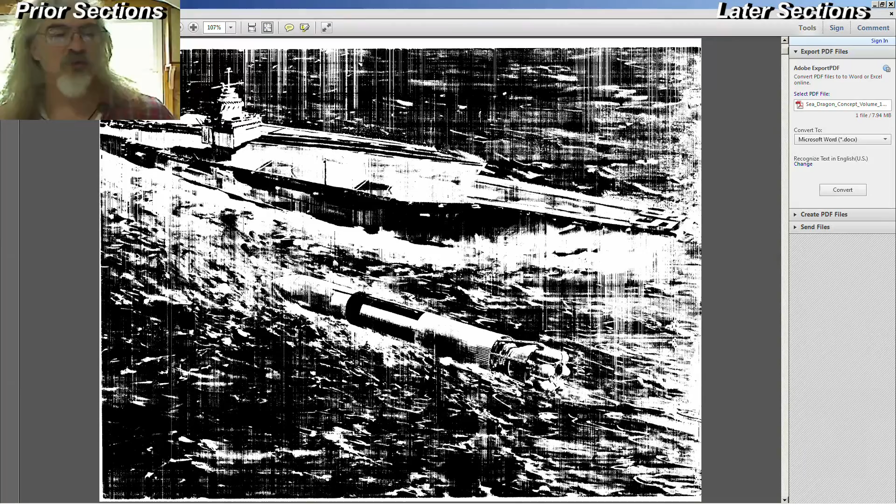It's a crazy cool picture. I wish there was a really good copy of it someplace. There's no apparent signature on this thing—who did it? Probably somebody at Aerojet General who's been dead for 30 years. I don't know if Bob had left a good copy.

All right, we're going to continue. See, they don't show the ring around here, but this other picture seems to. Maybe not. Well, what's this ring? See, that ring doesn't show up in this picture. This ring doesn't show up in this picture here. It would be right in this area here, but it's not.

Let's get rid of that. Go back to here. I'm sticking with the ring because it's closer to this mechanical drawing than anything. Guess I could—well, that's all right. We're gonna stick with this. That looks pretty close to that.

I'm going to have to, even though my Leapfrog Creatr is 200 millimeters tall, still print this thing in 3 pieces. It's going to be almost 500 millimeters tall, so 50 centimeters. It's pretty big.

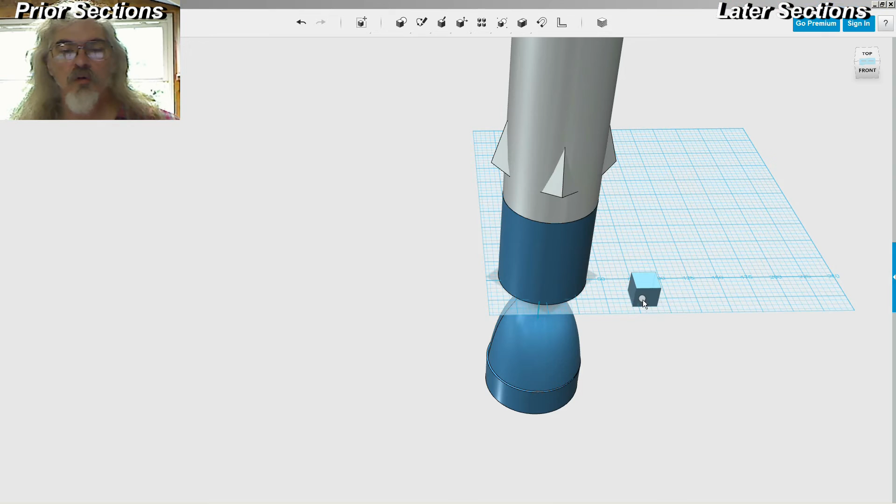All right, next is those arms. Those are just boxes, really. So we're going to make a box that's on the outside of this, lined up right there, whose length is 3 by 3, and height.

Oh, it's got the height. It's got a funny height. How tall is this thing? It's 100, well, it goes down to the top of the engine bell, so it's 100. All right.

Take this thing and move. Move includes, you know, rotate and stuff. Let's make it 90, and then let's just drag it. You can drag move things in here, but in my humble opinion, it doesn't work very well. It's never obvious in which direction you're dragging things.

See, it's sticking up just slightly above here, which probably is okay. And that's going to be a couple degrees in, which is correct.

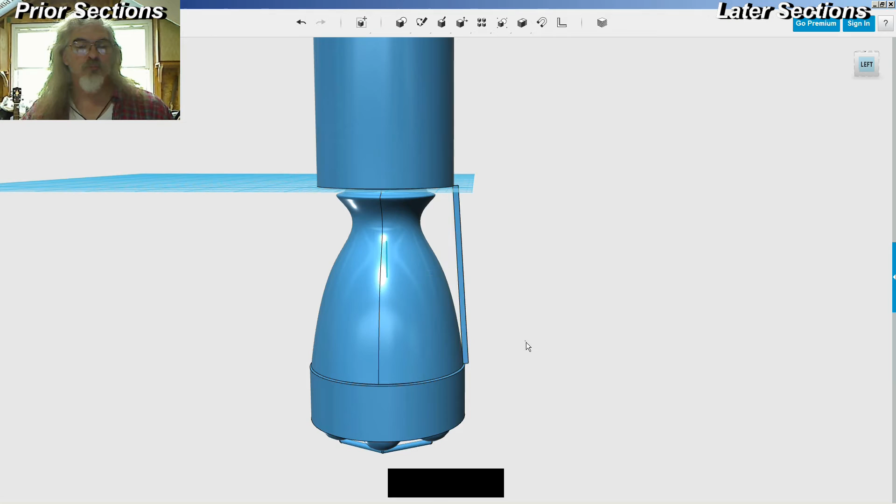One of the things I want to do is make sure that this thing is centered on this little grid line right here. But that point is not, so let's move him over. He probably needs to move over in the half millimeter range. Yeah, minus.

So let's do this. Let's grab this face. He needs to be a little bit taller. Push-pull this, pull it up a couple of millimeters.

Yeah, it attaches to something on the outside of the rocket, which I'm not going to bother to model. And again, this is a little bit short. Grab this face, and push-pull this, pull it down about here.

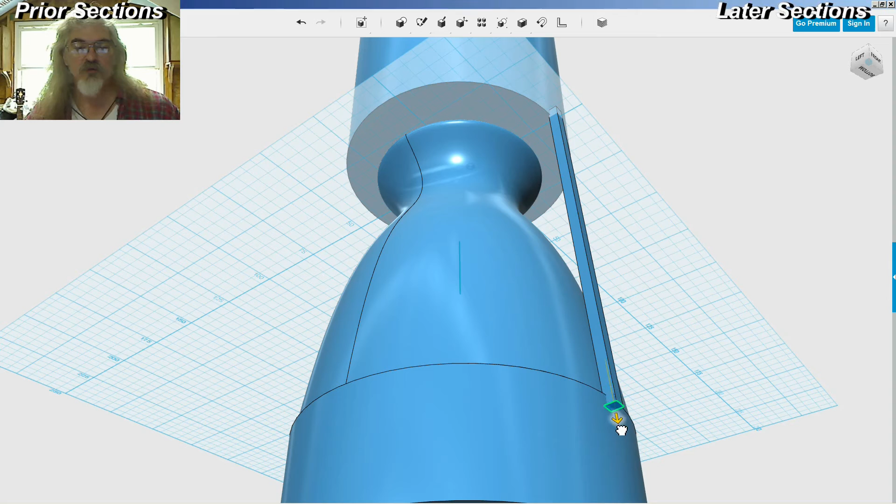Okay. Circular pattern. Grab that solid. Get down here so we can see this axis. Looks pretty darn close. All right.

There's pairs of them. How are these vanes constructed? What do you think? I think those are solids. Is this a cross section?

This thing stays in the water. This part down here, this whole section down here stays in the water. So these actually aren't hinges, they're releases. This releases this whole, these things kind of flap down like this, and the whole bottom section stays in the water. This whole ballast stays in the water. It's this thing that keeps it afloat.

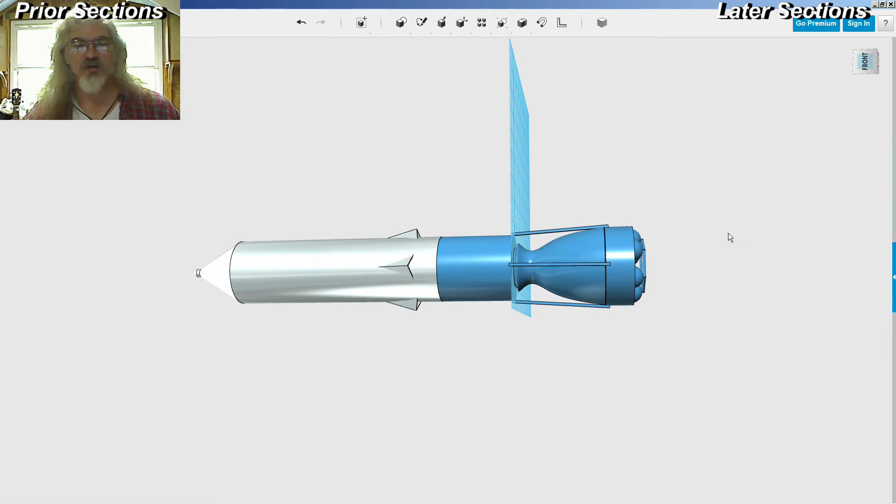When the rocket lights off, this goes down and then comes back up to the surface. The water line, by the way, is way up here. Here's the water line, I don't know if you can see it. There it is right there. So the water line is, where'd it go? There's the water line right there.

So here's the thrust vector controls, and here's the water line. So the water line is probably in this region here. So from here down, is all in the water when the thing lights off. All right, it's pretty close.

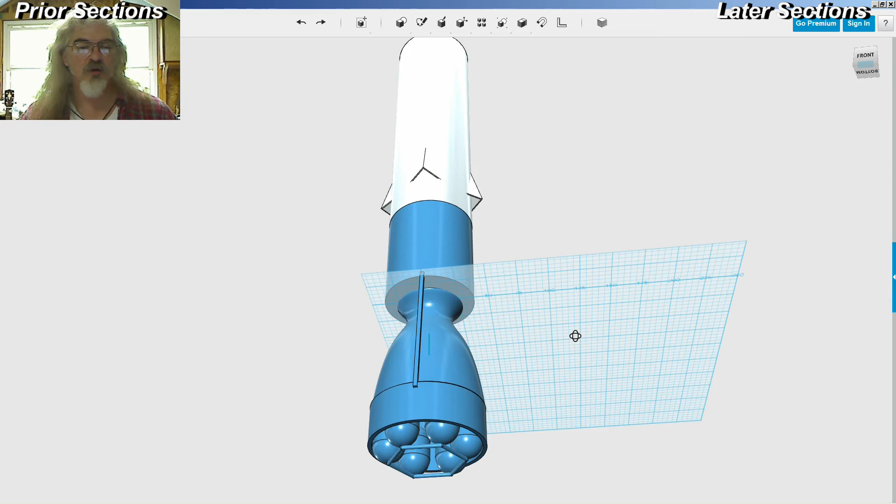So the last thing I did was change those around. All right, so the deal is these need to be a pair. Now, if I rotate this, unfortunately, it's going to rotate about its center. So then I'll have to realign it.

Here, see what I mean? Well, I grabbed the wrong control. Move. Grab that. Now I want to grab. Yeah, I want to grab that control.

What do you think here, 10 degrees? I'm wagging this one. Copy, paste. 20 degrees.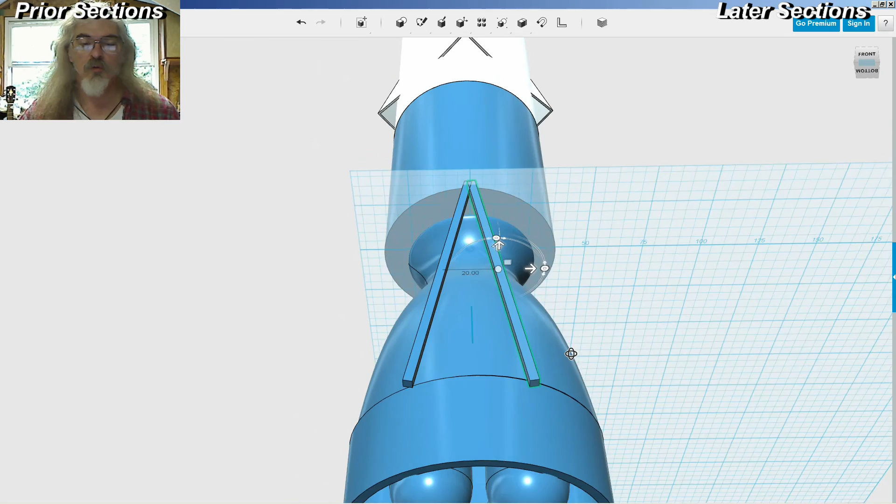And then move that back over here until these intersect. Of course, now neither of them touch the end here.

That and that, move both of these by rotating them this way, 1 degree. And then moving them in by minus 1 millimeter. Minus 1.5.

It's not rocket science, eh? That's weird, I'd have thought those would have lined up better.

All right, move those over, and 2 and down. All right, how's that? Looks good down here. Something not even.

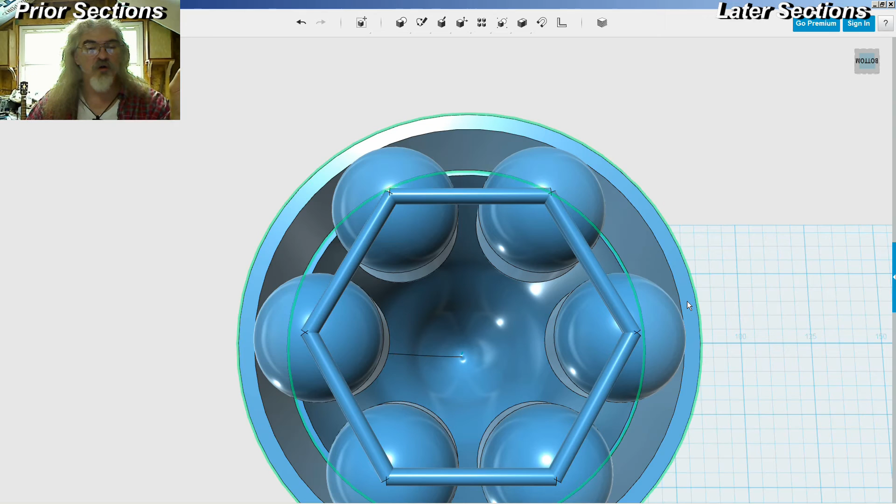All right, let's grab all of this. 2, 3, 4, 3, 5, 6. 1, 2, 4, 5, 6. Move all of that to the right by 1, not even that much, 0.5. All right.

What does that do to this? All right, let's move him here, and him, move him back over. I would swear that's lined up. I don't know what I do here.

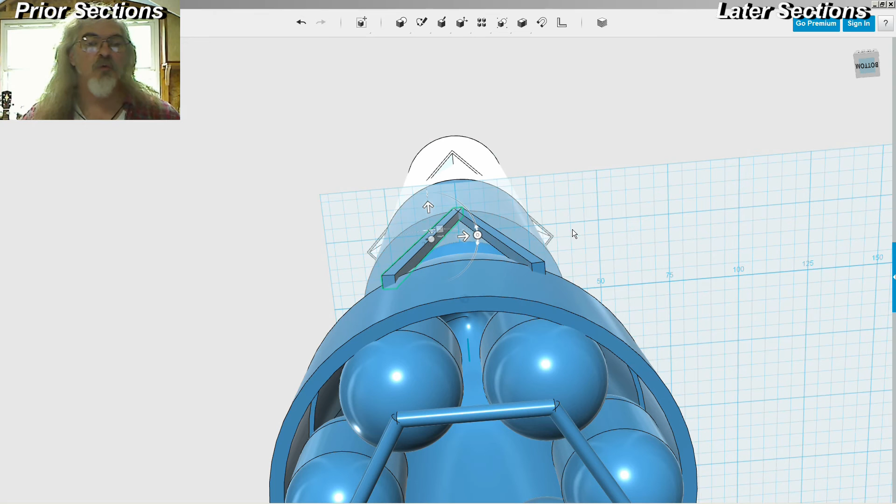Going to rotate that by 1 more degree, and this axis, 1. Tweaking back over... 1.5. That's as close as I care to bother to get.

Alright, I'm going to take these two, I'm going to merge them together. That one and this one. Alright, so they're now one object.

Take this object, make a circular pattern about that axis. 4.

Alright, that looks good. I also am going to need a triangle. I'm going to use something interesting here - we're going to use the loft. So I need a couple of triangles drawn in the spaces. To do that, I'm going to make myself...

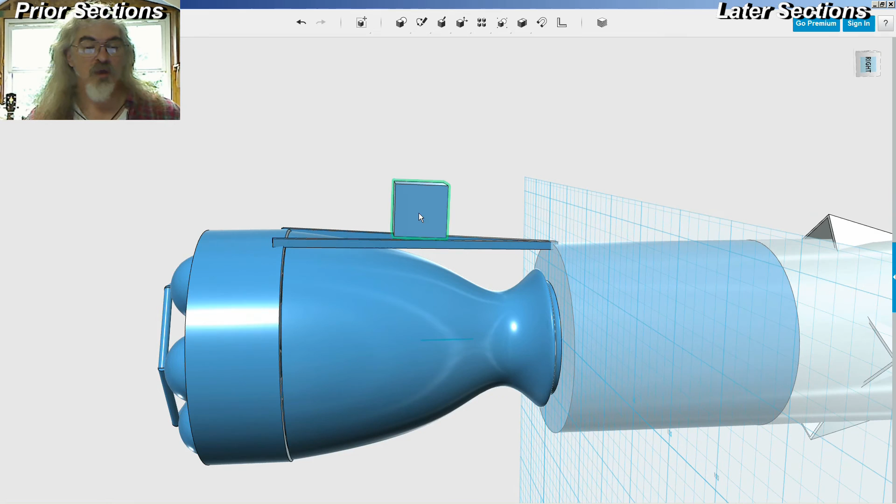I need a reference plane in which to be able to draw this sketch. So that box is just a reference. I'm just going to use this face of the reference plane as a reference plane in order to draw things.

Where do they need to be drawn? Doesn't really matter. It's got to come - see, it's not going to come all the way down, it's going to come most of the way down. And those things weren't perpendicular to that either - they're about almost a 45-degree angle.

So rotate this by 45. This is again just a sketch plane. Alright, draw - let's draw a polygon on that sketch plane.

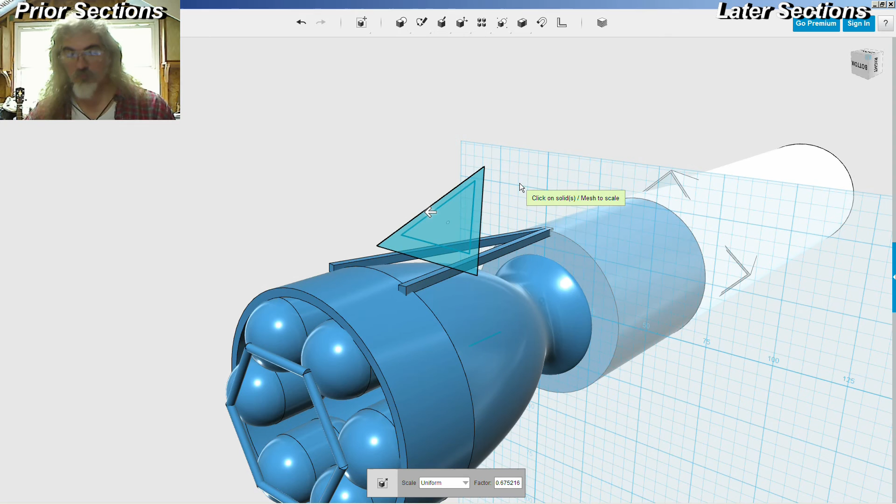Center of the polygon should be right here, and I want 3 sides. That's the center. That'll do. Excellent, okay, that's pretty cool.

Let's just go ahead and hide this guy for a moment. Alright, I need to scale this. And then I'm going to need to move him - move the whole thing, move.

It's not bad, that's kind of cool. It's the first time I've tried to do exactly that, so it's kind of neat. Scale him down till he's going to fit. Move this guy then down to...

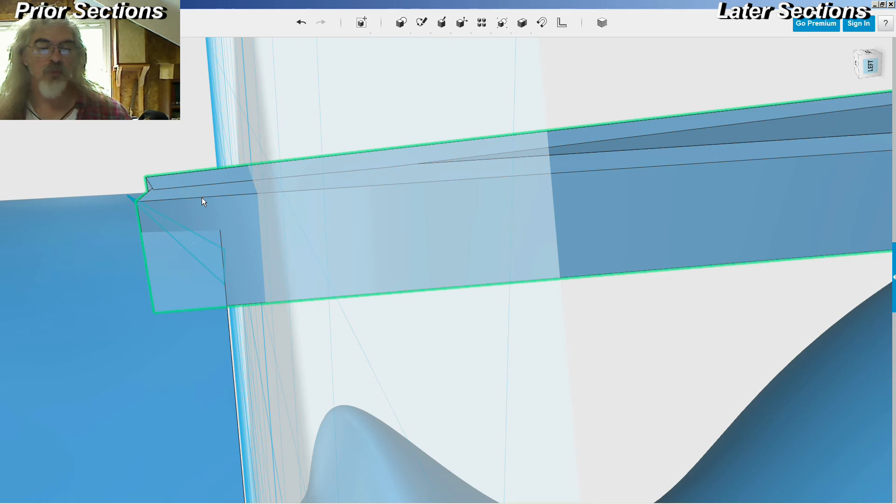And now we're going to use the loft. New solid. Him. Him. Him. Hide this for the moment so we can see what we're trying to do here. Loft. That. That.

Do I have to have 3? Maybe I have to have 3. Show solids. So we definitely don't need that. Alright.

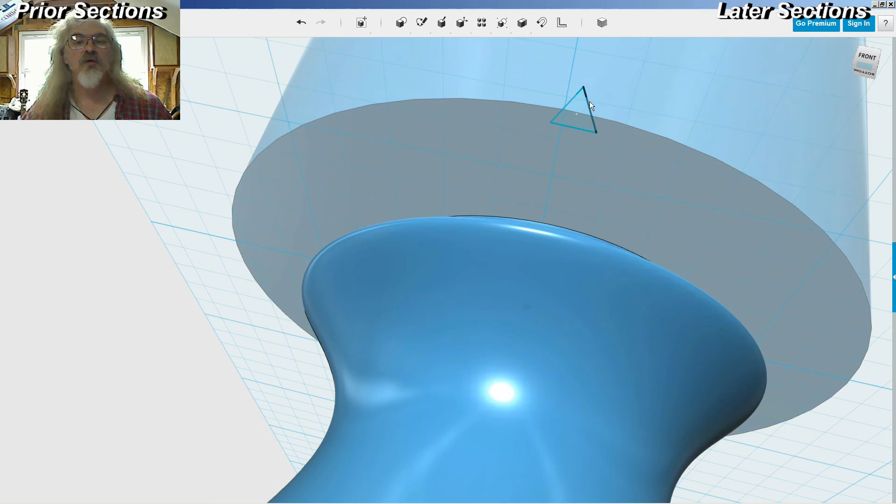Show solids. Alright, so that little triangle isn't lined up quite right. You need to be hidden, but you're not letting me get to this guy. You also need to be hidden. You need to move that way.

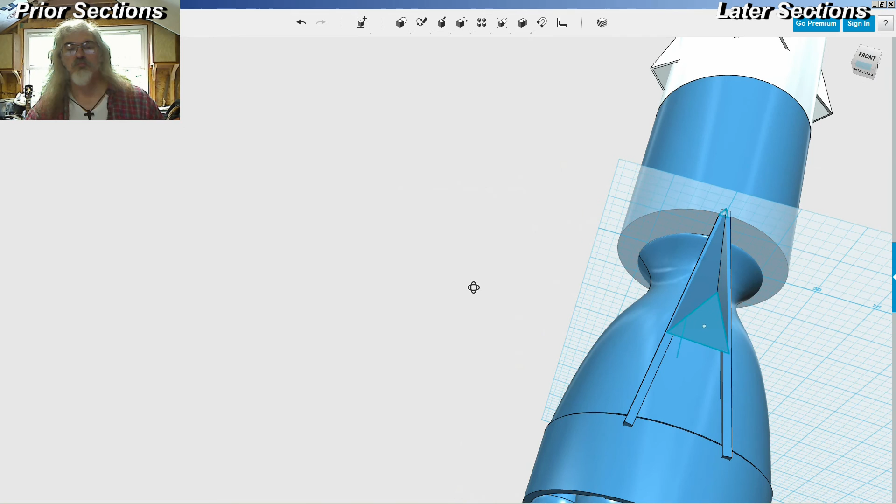Cool, that worked pretty well. Alright, he needs to move. Just trying a 0.5 millimeter. I didn't finish the operation - oops. Hit enter, let me go back to the solids. Okay.

I don't know what those things are really intended to be, so... okay.

Merge this together. Alright, now I want solid objects. Now then, make a circular pattern out of that. Axis, that axis.

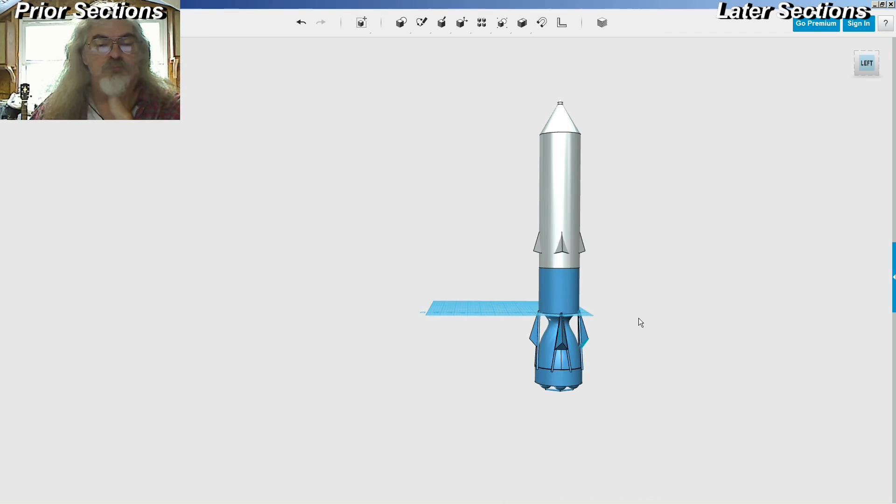See, I still haven't finished the operation, right? So they're still kind of here, and I can turn individual ones off if I wanted to.

I think I'm going to pretty much call that done. I'm going to end up printing these guys probably as separate objects, and then print the bottom section here upside down as one object.

The nose cones separately - so, I'm sorry, not the nose cone, rocket bell separately. This is just a cylinder - well, no, he's more than just a cylinder, right? He's actually got a cone on the top.

But I'm gonna have to break this in half in order to print it. Not entirely unlike this Falcon 9 rocket, which had to get printed in 4 pieces. Actually, it'll be almost as tall as this thing when I print it, although this is not the same scale - obviously, if this was the same scale as the Sea Dragon, this nose cone would be about that big.